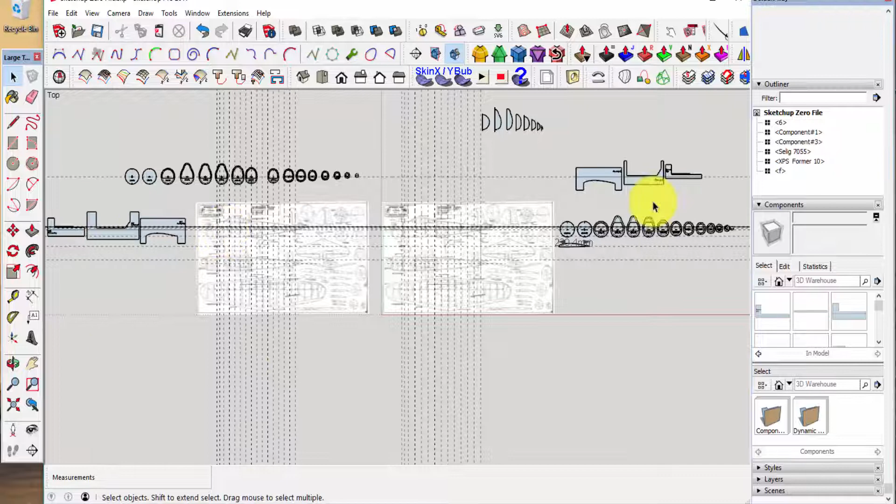Stick around. Okay, everyone, we're back in the SketchUp workspace. While I was offline, I completed the formers for all of the XPS fuselage cutouts and sort of parked them over there. I moved our EPS formers over here. These are the ones I'm using for most of this illustration. Next up on the to-do list is to make the templates for the hot wire cut foam wings. And to do that, we need to know, of course, what the dimensions are on our airfoil.

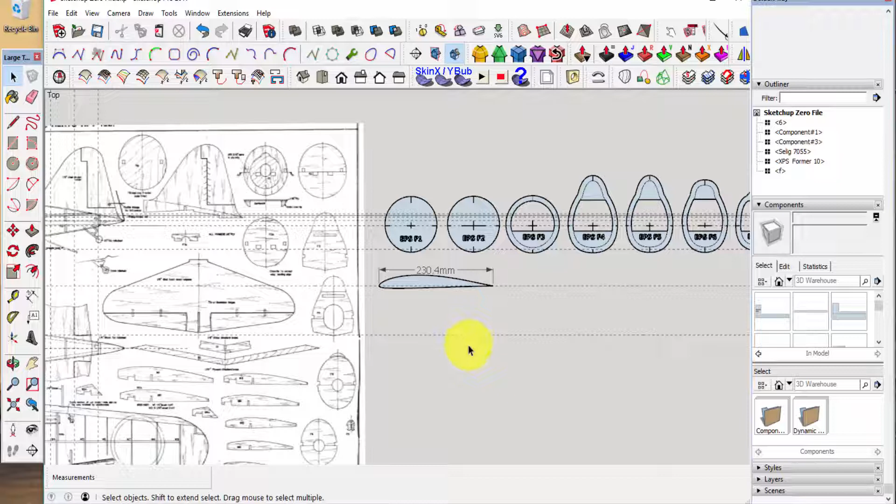There's a tool. I didn't illustrate this, but it's a tool over here on your toolbar that says dimensions. Of course, you click on one point, another point, and drag it up. We'll show that a little bit more later. But at any rate, what we need to do is take this airfoil and make something that we can use to cut a core. And it's going to be very simple and quite a lot like what we did for the fuselage. First of all, we need more or less a rectangle, so we'll just drop that. We'll put it on a line here that we know is on the ground plane, and I just drop that down there. It's really not important what this size is, as long as it's a good bit larger than your airfoil.

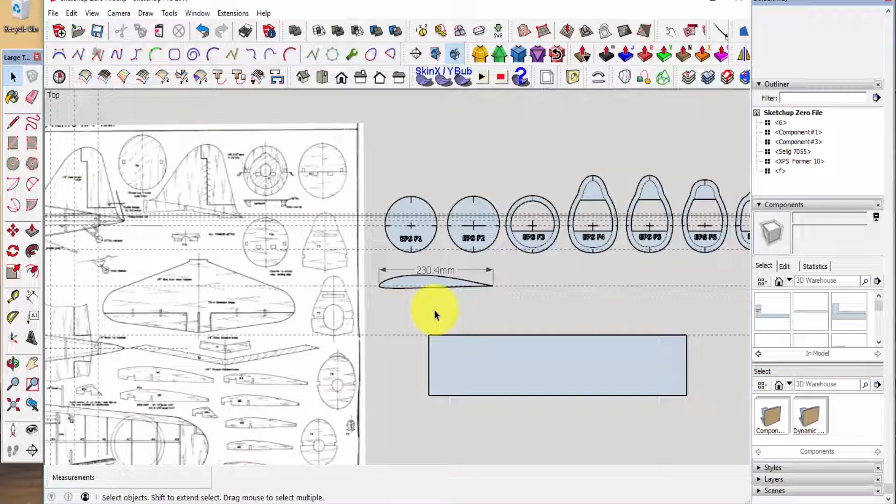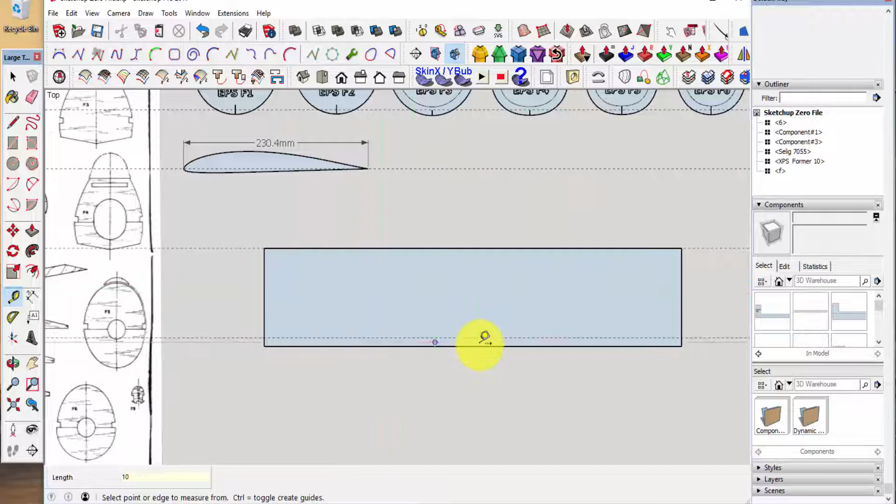Coming down here now, we're going to put some construction lines in to make things easier. And the first one is we're going to decide how far up from the base we're going to have the bottom of the airfoil appear when we sit it down here and have a cutout. I chose 10 because that's just a good all-around distance for me. You want it fairly low because it helps you save foam, but it can't be too low, or the arms from your hot wire cutter will come down here and contact the table on which these are going to rest. So you don't want that either.

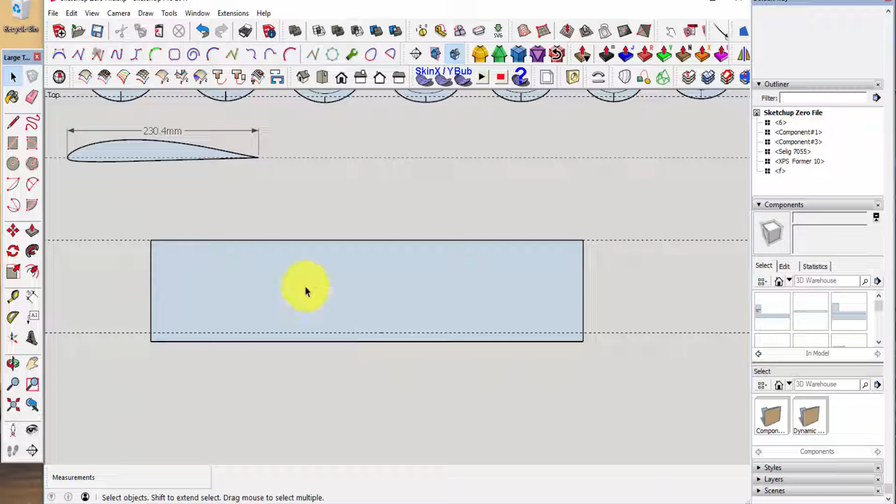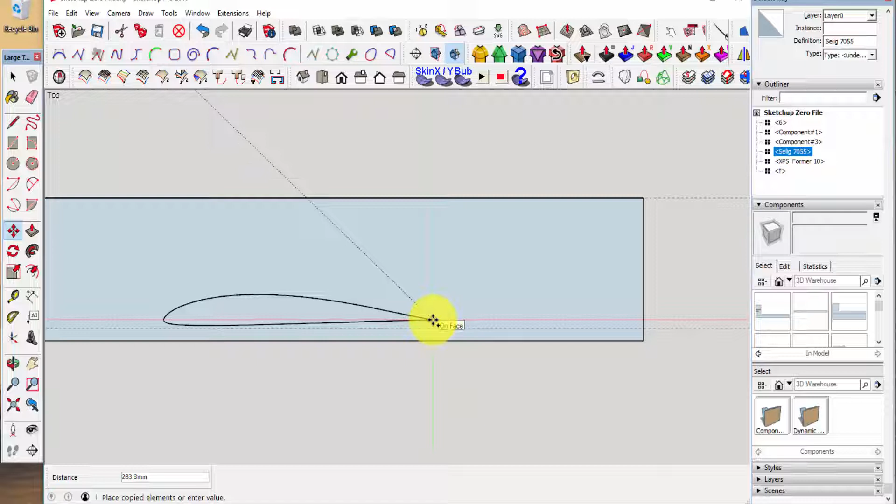Next, what we're going to do is move a copy of the airfoil down here. Again, our old familiar M for move, Control C for a copy, and we're going to pick a known point, which is going to be the end point in the airfoil. Now, this construction line down here is a reference line. It's not the be-all and end-all. It doesn't have to be super accurate. This just gives us an idea. We don't want to be below that, and we don't want to be way above it, but just somewhere in the neighborhood. We're not going to drop it on it. There's no need to do that at this point. So we just come up to clear the 10 millimeter line and put it right there.

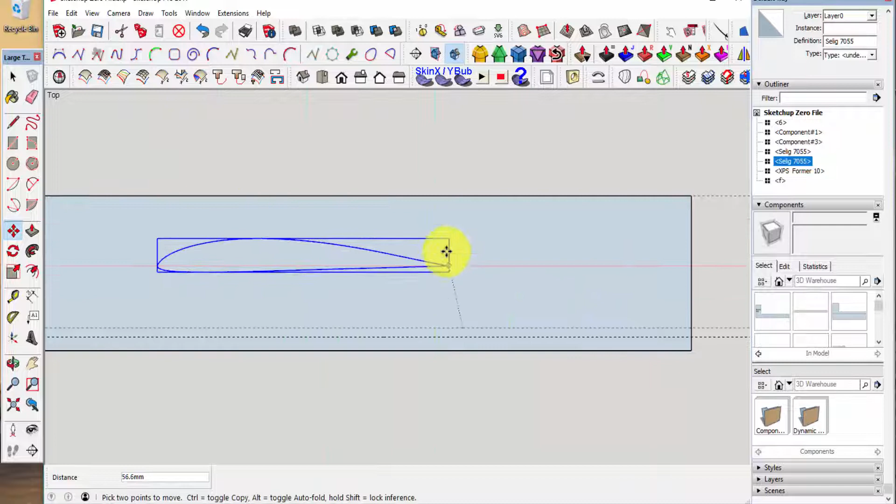Now, to make sure that we haven't moved this in three-dimensional space, I'm going to do a quick check. I'm going to take yet another tape measure tool line and come up here and see if we're on. We know that this bottom line is on the ground plane, so moving one parallel to that will also be on the ground plane. So now we know where this should be, no matter where it ends up being. As long as we drop it back on that line, it's on our ground plane.

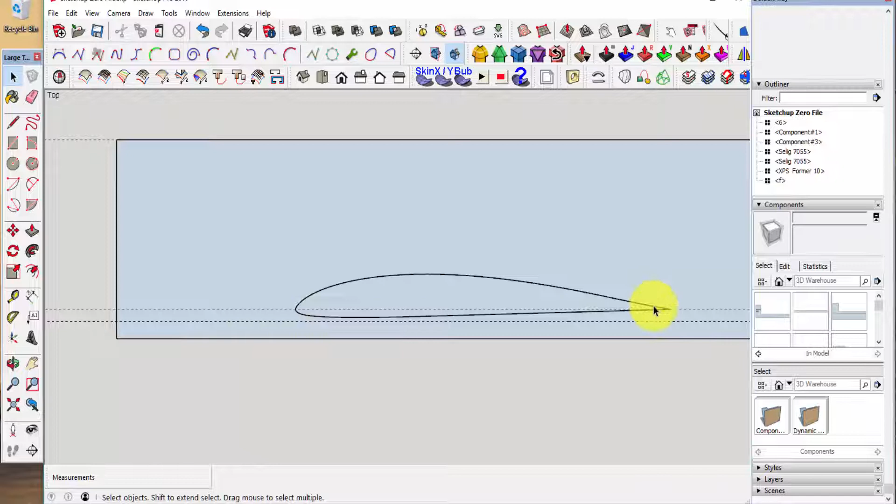Now we're going to start doing the dimensions and reducing some of the size of this huge rectangle that we have. What we need is a way to cut both the bottom curvature and the top. So we're going to need two templates, one for the top cut, one for the bottom cut for the root rib, and we're going to need two templates cut, of course, for the smaller dimension over here on the tip rib. And here's how we're going to do that.

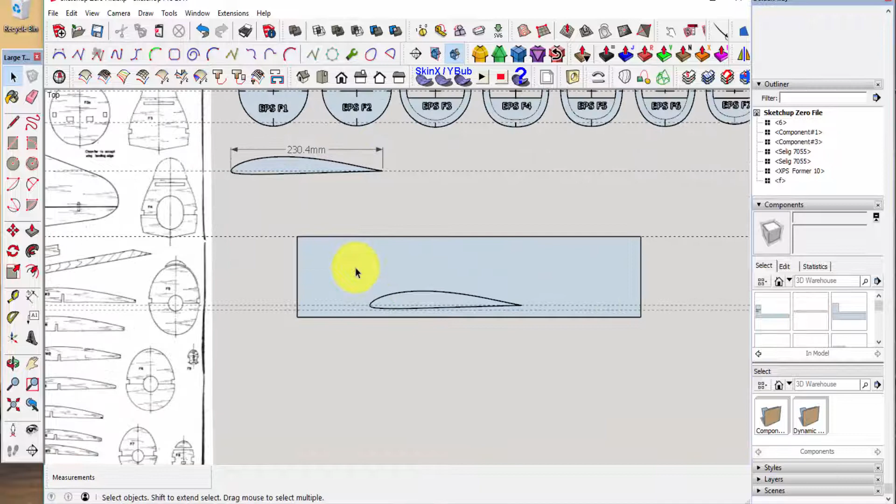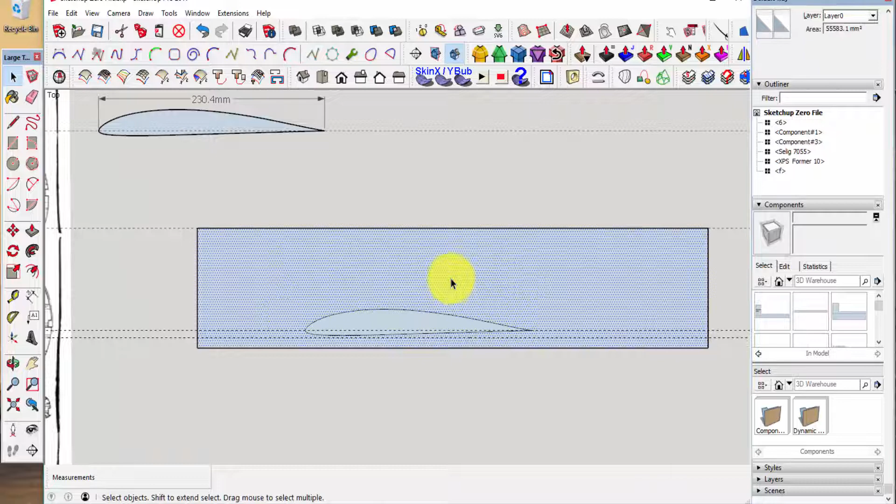Right now I'm going to hit explode on this because we're going to continue working on this and removing parts. So if I explode this, this now becomes part of this rectangle that we have just done. And we can draw on it and both will sort of take.

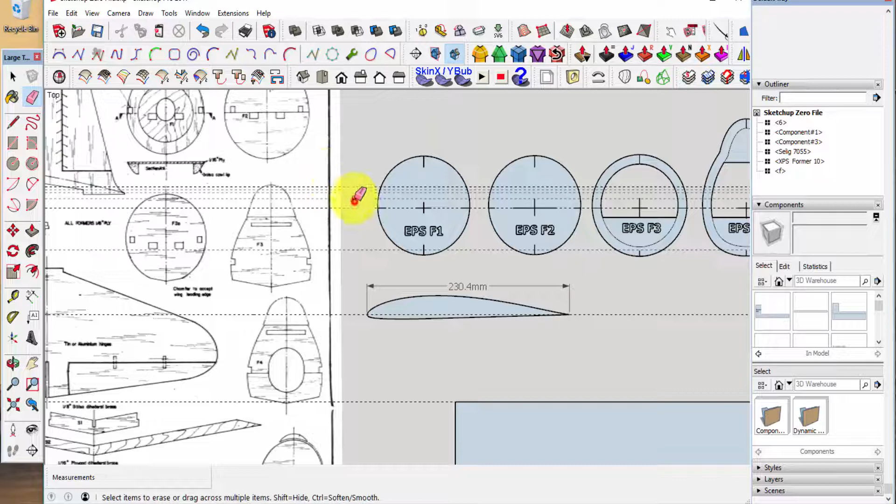Now I'm going to get rid of this kind of declutter thing. I'm going to erase this lower line. We don't need that anymore. As a matter of fact, I'm going to declutter a lot of this stuff up here that we used to measure things. I don't know why I let it just keep building up. It just confuses the issue down the road.

Okay, enough housekeeping. Now, there are two things that we need on these that are going to be common to both sets of templates, and that's a lead in and a trail out line. So we'll come up here to the very first point on our airfoil, and that's just a bit below the line as we see here.

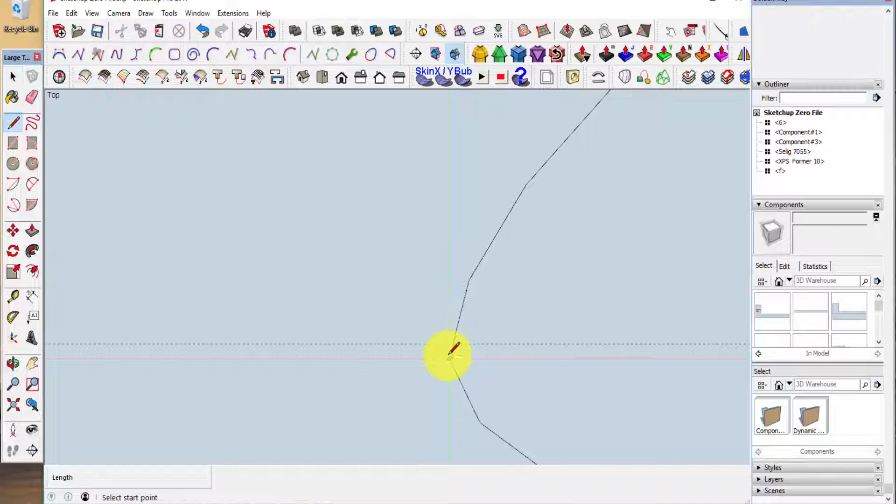So we're going to go from that, and the distance that we're going to go is pretty much immaterial, we're going to go on the red axis on the face. As long as it's long enough to give us a good lead in with our hot wire, then we'll drop down to the base. Now we're going to cut that down to shorter, but I got to measure it first.

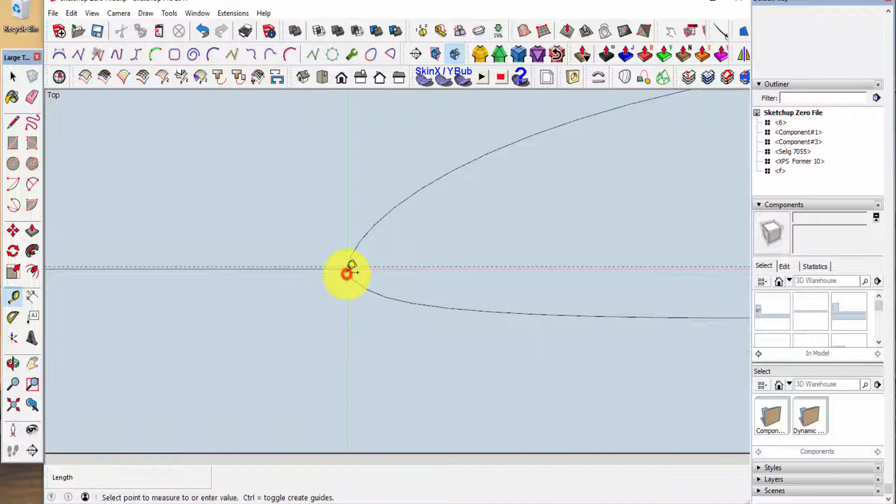So we'll take our good old tape tool and see what we got here. We only need about 20-25 millimeters. It does not have to be huge, and I've got huge, so let's undo that. We'll go to the tape tool, tape it here, and we're going to go out 25 millimeters. And we're going to drop our line down there. Okay. Here we go. Should have done that first.

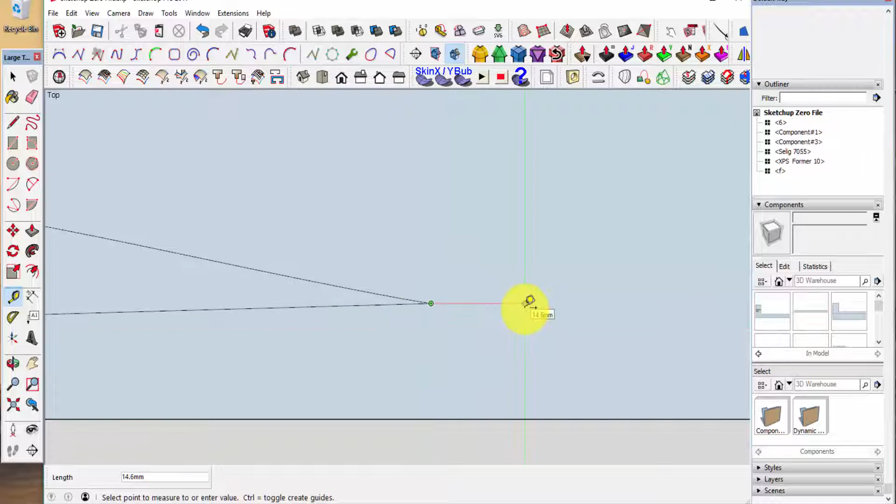Now we also need, just as we came in with the hot wire here, we need a lead out when the hot wire exits the curve, and we're going to do the same thing. And this time I'll be smart enough to use the tape tool first, and we'll go again 25 millimeters out the back, and we'll take a line.

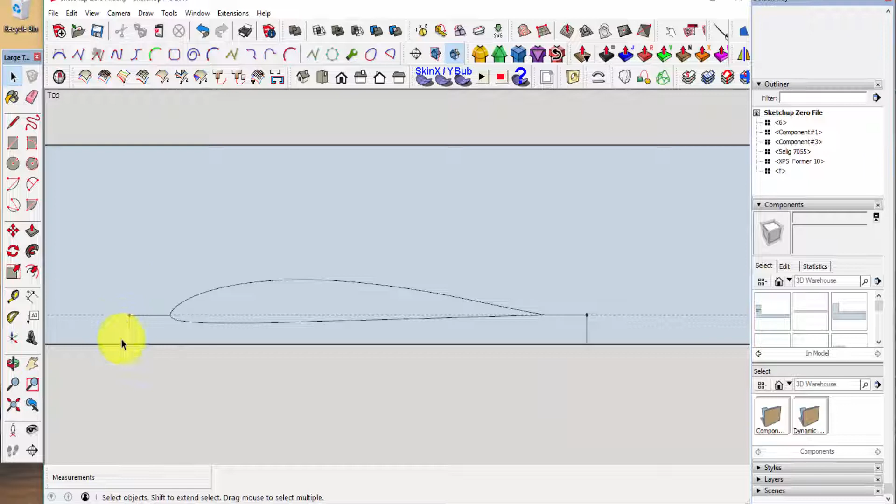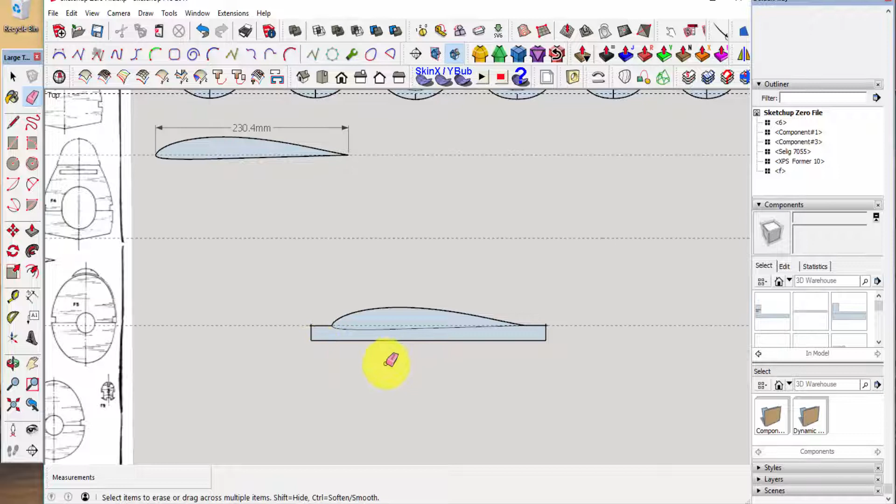We'll go from point to point, and now what we have done is created a shell here, and we can get rid now of a lot of this extraneous rectangle that we used. We're just going to more or less cut this away. So our erase tool comes into play now. I'm going to hide our construction lines again so that I don't end up inadvertently erasing them. Bring the construction lines back. Okay. Now there's a couple of things that we need to do further.

First of all, when the hot wire comes out of the back of the curved cut, the wire is going to keep moving. So back here somewhere, this is arbitrary, of course, after it exits, and far enough so that the heat from the wire won't damage the cut, we're just going to come back here and drop a little notch. Now the dimensions of this notch are not extremely important.

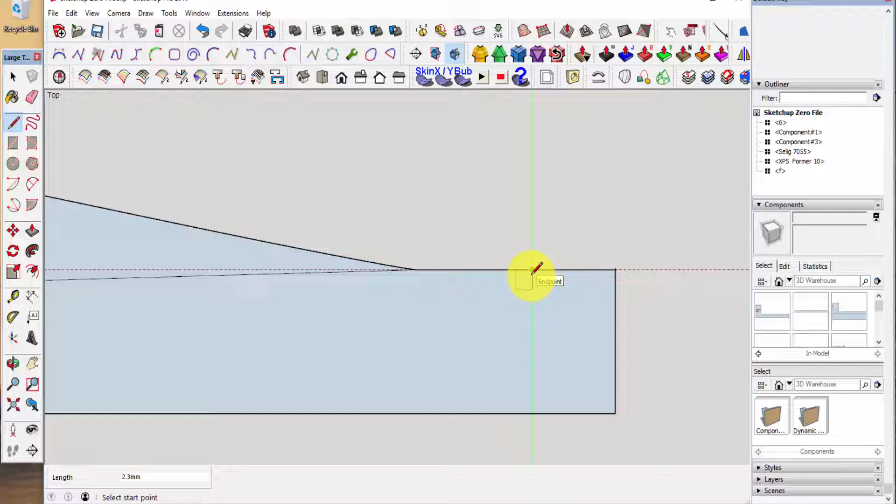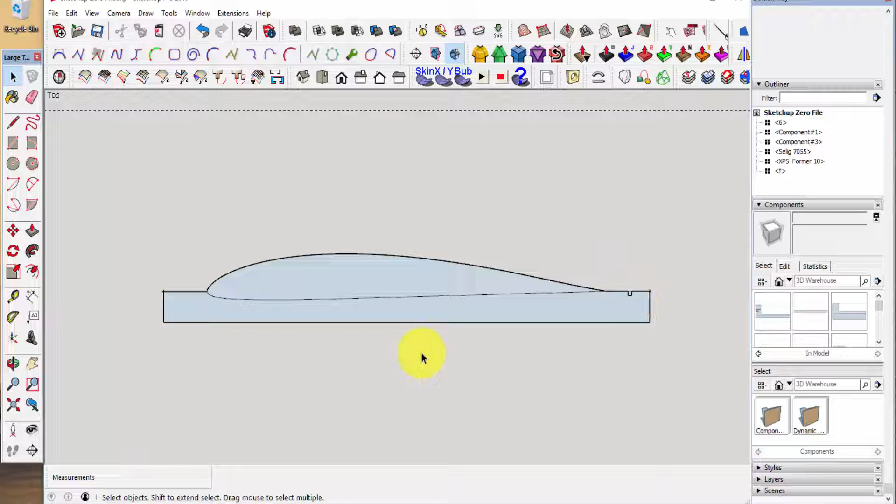What it does is it acts as a catch. When the wire comes off, it's going to keep moving, it's going to get here and catch, so that your drop bar just doesn't drop on the floor. Alright, well, we've got that. Now that's looking great for our top cut, except for one more item.

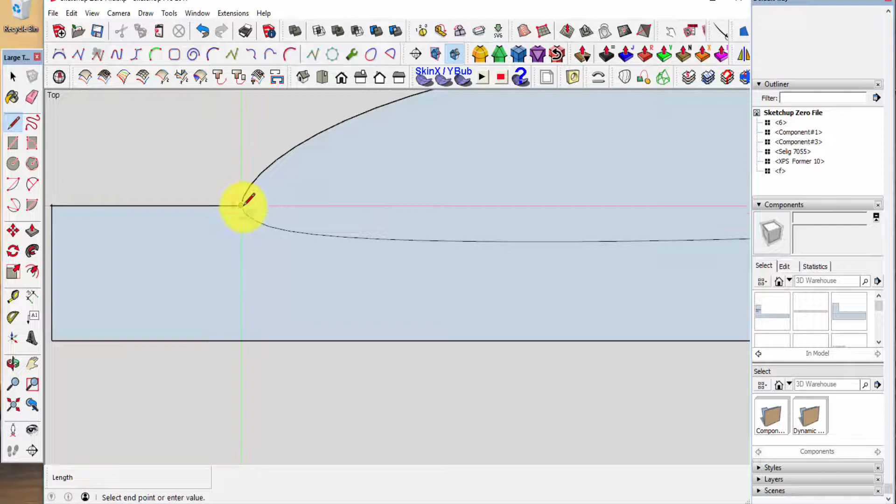When we align these templates with the end of the foam blanks that we're going to use to cut this, we need some way to align the front of this with the front of the foam. So we're going to drop a line from the very front of the airfoil template, of course, and then we're going to come in here with another line, and we're going to make a cutout. And again, we'll use our good old tape tool here, and we'll make this about 4 millimeters.

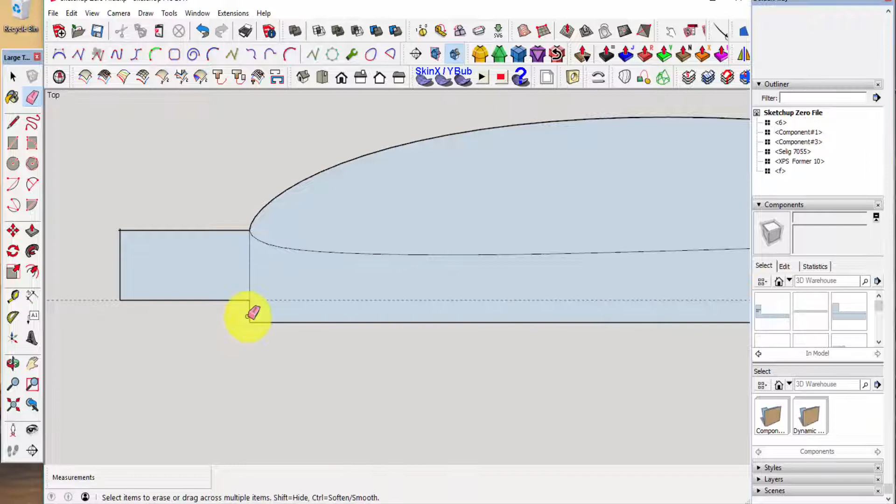What we're doing is we're going to take out a notch on the front of our templates. Now that will allow us to align very easily. All we have to do is lay a straight edge on the foam core and then bump this up against it. This will allow us to align with the front edge and be absolutely true to where we want to start the airfoil.

Now, a couple of other things before we make the lower one that we want to do, and we want to do this because this part of the airfoil, this bottom base, has to be exactly the same for the top and the bottom. It can't be repositioned or moved sideways or up and down. And in order to hold these

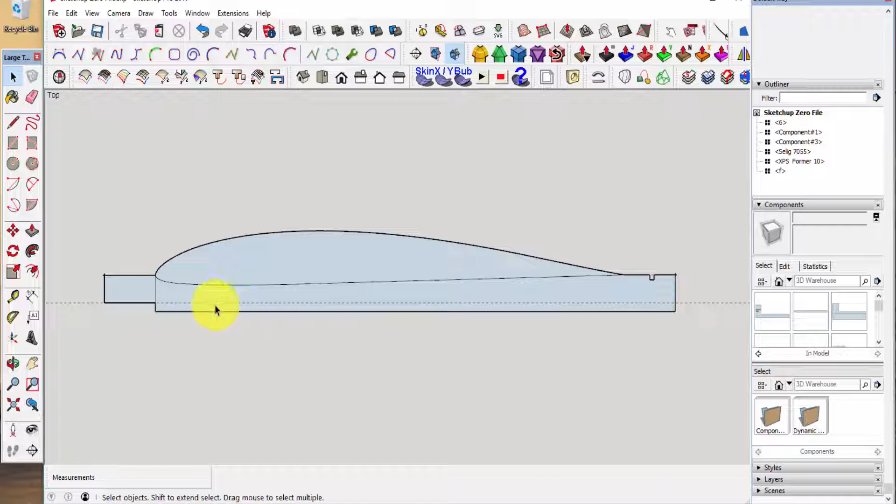onto the foam block, we're going to need holes in here. I use finishing nails, and I found that 2 millimeters is a good hole size for a finishing nail. Your mileage may vary. Whatever you're going to use to stick these templates to the end of the foam block, use that diameter. Like I said, finishing nails work fine for me.

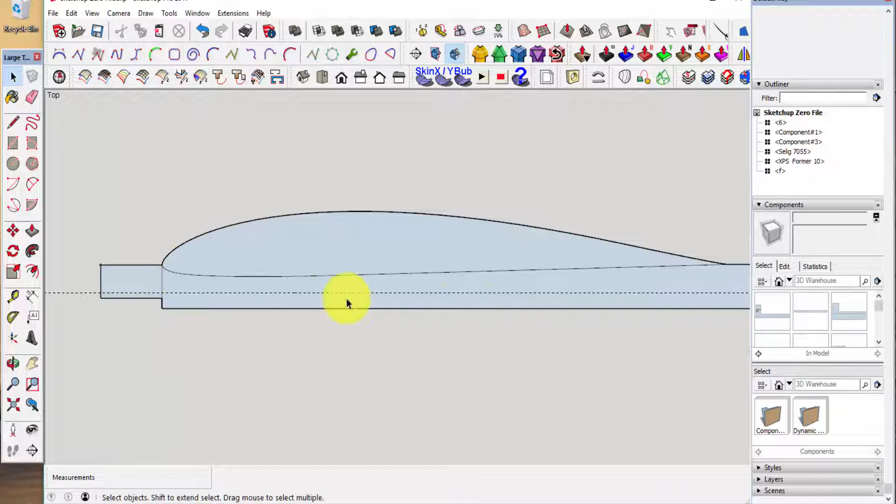So in order for these to all be on the same line, I'm going to come up here, about 6 millimeters. Again, this is arbitrary. You don't want these holes too close to the edge or too close to your hot wire cut. And now we'll come in here with a circle tool. Just hit C or choose circle from your tool set here.

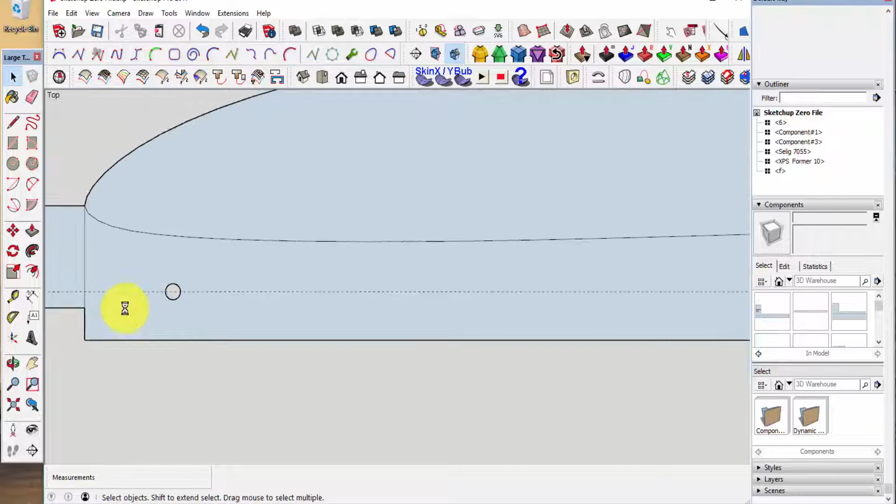And we're going to need one in the front, and that's going to be a 1 millimeter radius for a 2 millimeter diameter hole. And then we're going to punch that hole in there. Then we're going to do an automatic save again. Then we're going to come back near the back of our foam block, not to the very extreme back, and we're going to do the same thing.

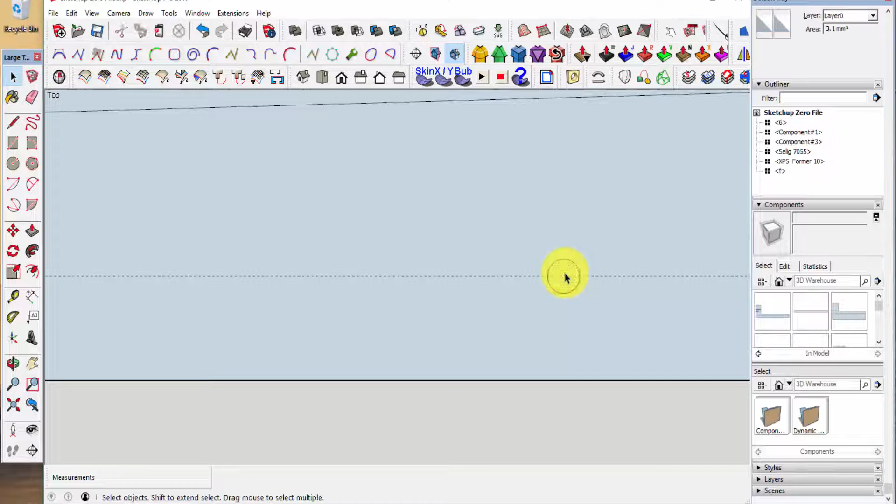Again, we're going to do a 1 millimeter radius for a 2 millimeter diameter hole and punch that out and delete it. And then somewhere along the middle, again, not critical, somewhere along here, yet another 1 millimeter radius, 2 millimeter diameter hole. Punch that out. Now we've got the holes set so that we have a means of attaching these templates to our foam core.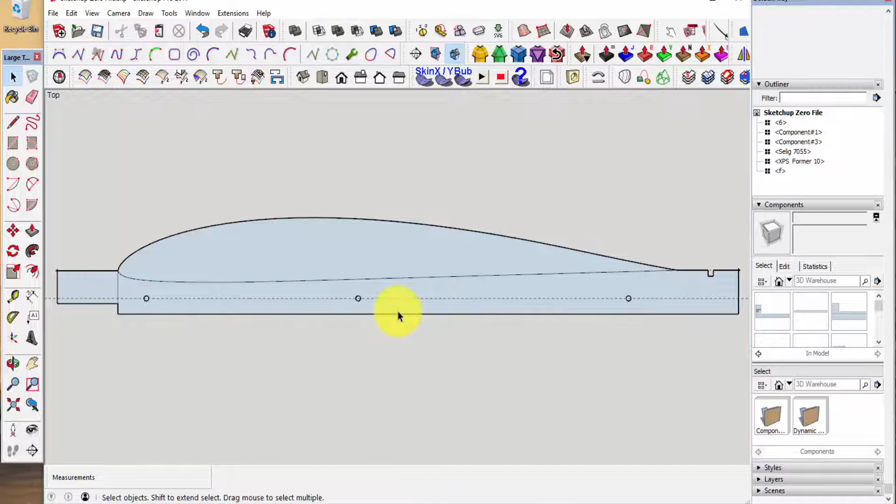And since we're going to need one cut for the top, one cut for the bottom, that means 2 templates, and we want these to fit exactly in the same holes. So now we're going to take what we have done so far, and we're going to move a copy before we do any other manipulation with that, and just come down on the green axis so that we know we're on the same plane.

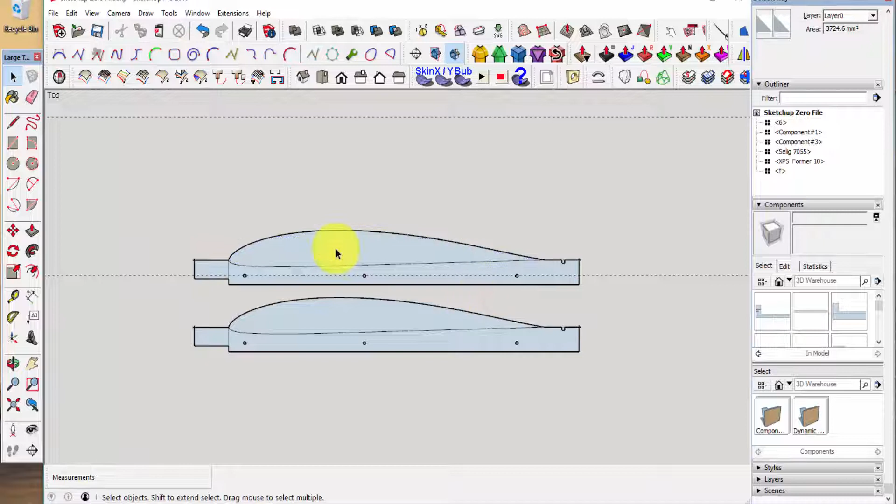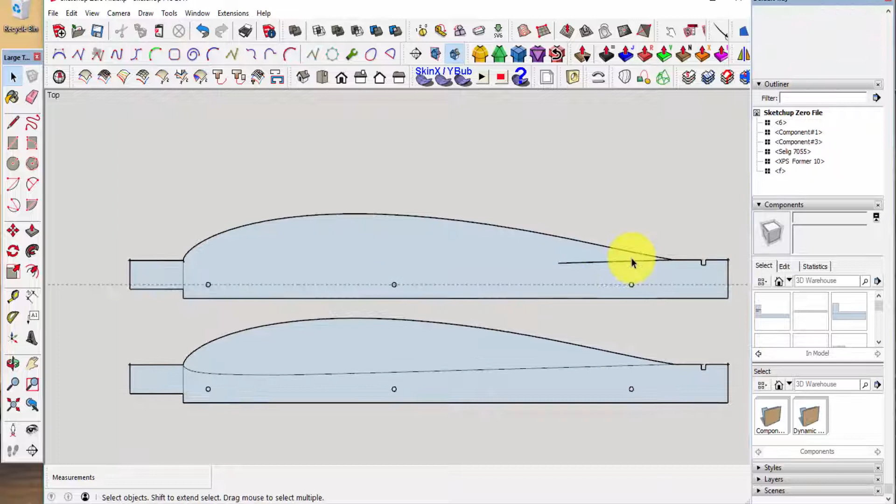Now we're going to use this top one for the top cut, and that's fine. We can just leave that as it is, it doesn't really matter. If having this line in here bothers you, you can always just come in here and erase this bottom part, but what appears here is just going to be cut out, taped on to whatever material you choose to use for your template material. I'll go ahead and erase that just to make it pretty.

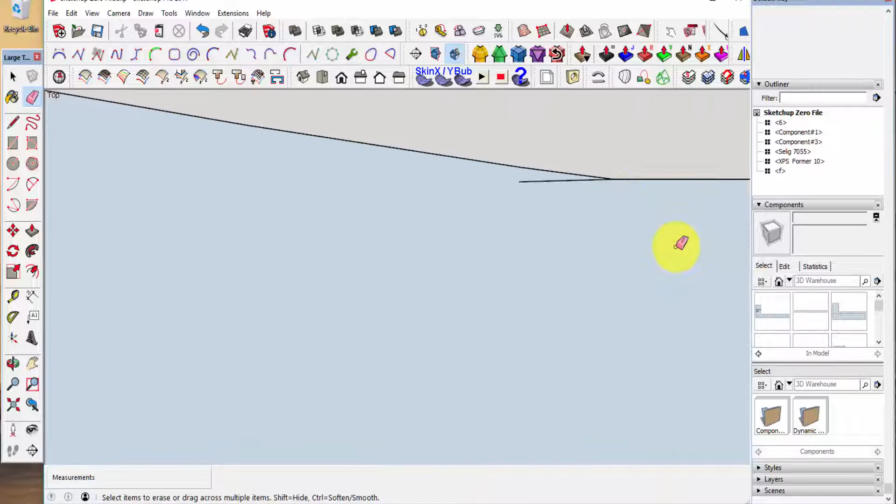As you can see, these curves are not actually curves, they're line segments. There's just a lot of them and they appear to be curves. Oh, there's even one way down here. Okay. Alright, there you go. That one is done. Now we've got to have our lower curve in here, and we are going to have to do some erasing down here.

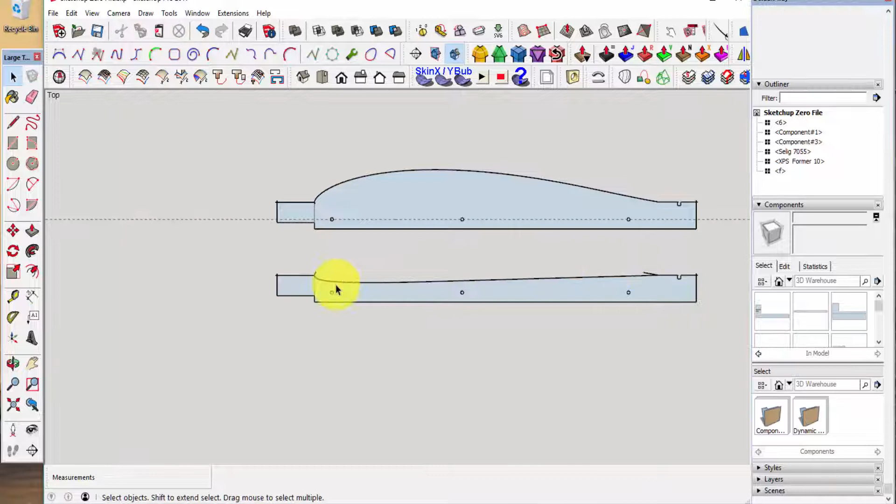So right now, we select that template, we get rid of that, and come in here and start getting rid of that upper curve. There we go. Now you have it.

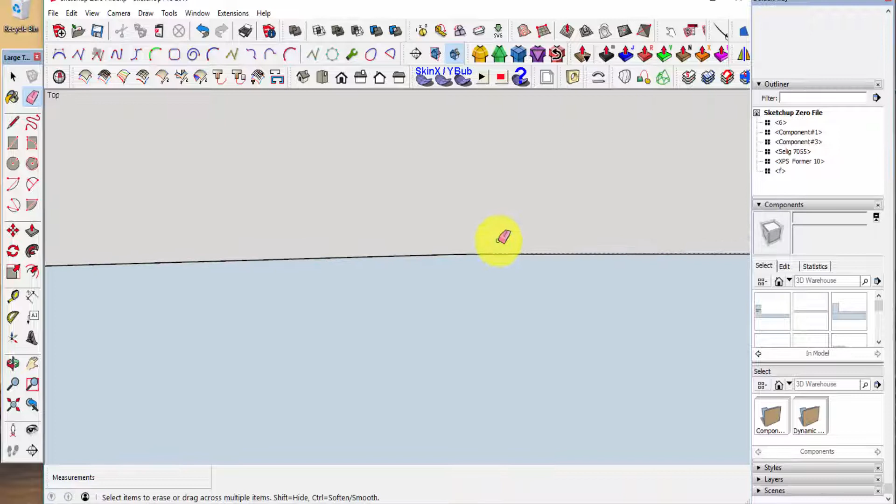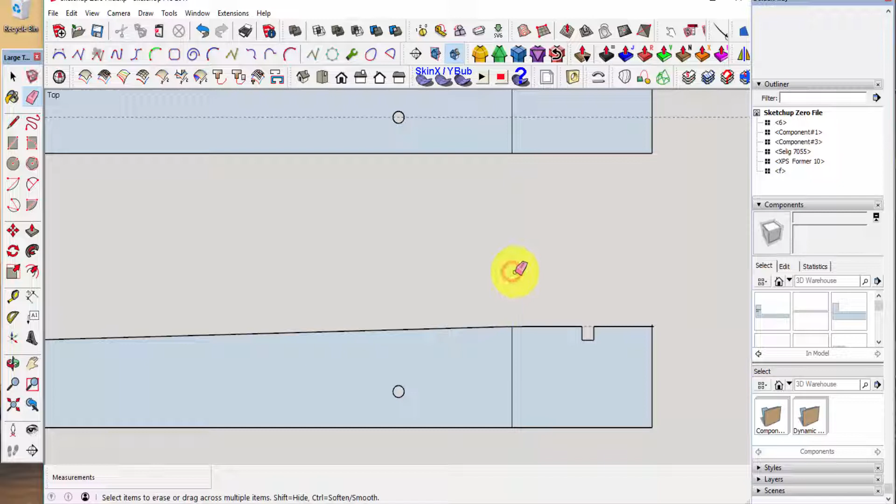One thing I am going to do, just for reference sake, is I'm going to draw another line on the template at the very back where it comes off of the foam. So if I go up here, now we've got a line that will be through, and we'll know if this aligns with the back of the foam block that we're absolutely true in our alignment. It's just a reference line. That line is probably not absolutely necessary.

Okay, now we've gotten the root rib template done. This is all we need. We can print this out, stick it on a piece of whatever you're going to use. Like I said, I use masonite cut out with a scroll saw, or some aluminum flashing, whatever you can use that can be smoothed so that the hot wire can run over it.

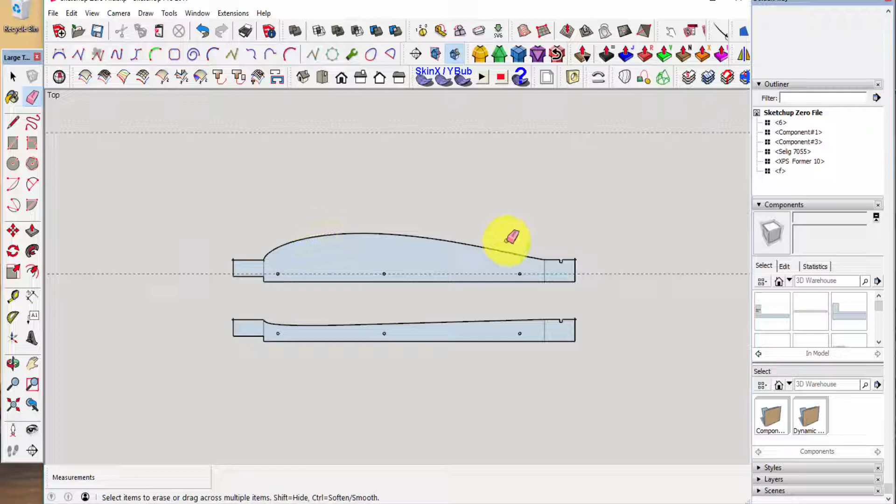Now we've got another set of templates to make, though, because of course our wing tapers. So we're going to have to come over here and measure what we're going to need for the tip template. Now we're going to make this template start right about here instead of out here at W9, because we need to have the foam block, the square portion of the foam block, end before we start the tip curvature. The wing tip is going to be a separate block of foam that's glued on after we've cut the core. We'll glue on a separate block and then shape it to match.

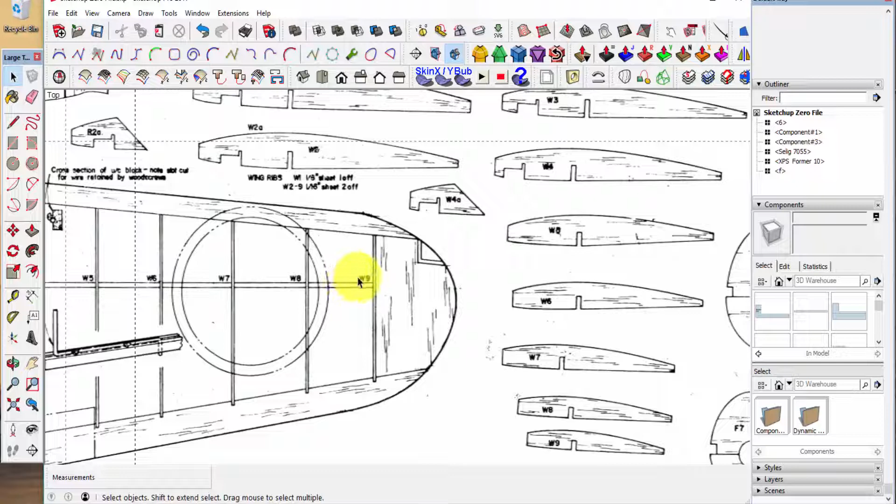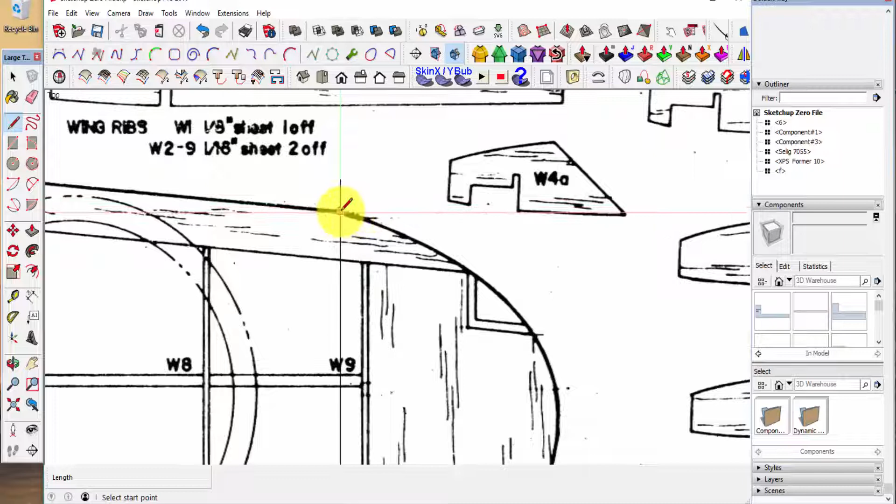So if we come over here now and we start looking for a place to drop a line, we should see that the curve starts right about there and come down to here. Now, again, I'll drop another line up here so we'll have some place to reference for a measurement and come out. So we know that our tip rib, and tip templates, is going to be this long.

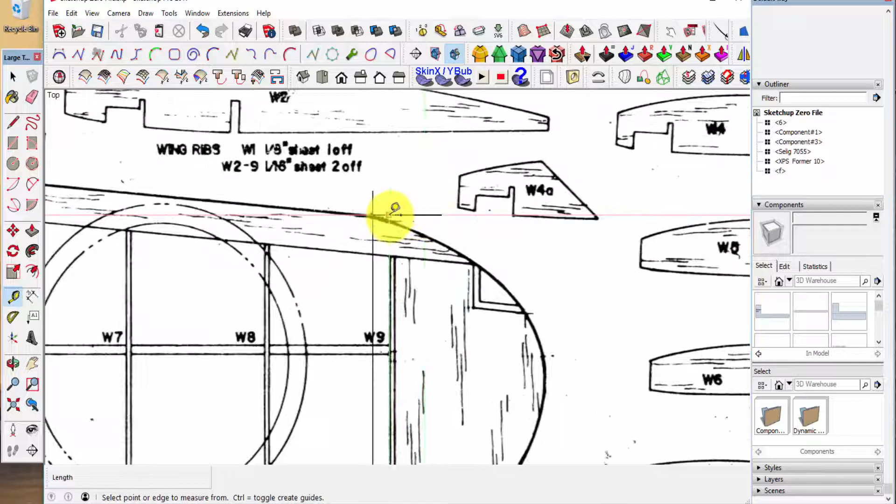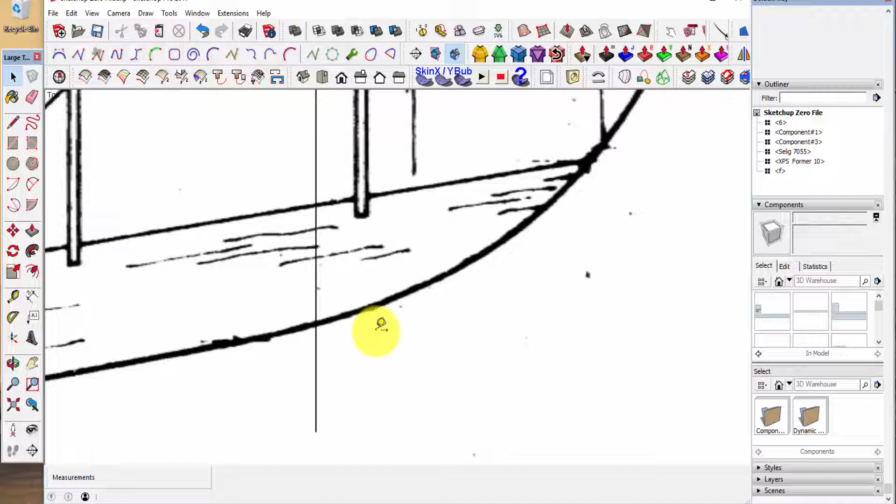So now I'll go back to the tape measure tool again to figure out what this length is, and we'll just come in here, get on this line, come down here, and as you can see right there, we're at about 126 millimeter, 125.8, we'll call it 126. So our tip template is going to have to be 126 millimeters long.

What we've got to do now is take our master component, move, Control C, a copy, and we're going to move this over and resize it. I'll drop it down here. Now, we have to be careful when you're working with components in SketchUp and you're working on a copy of the component. Whatever I do to this will automatically be done to that. And we don't want that. We want this to remain its full size.

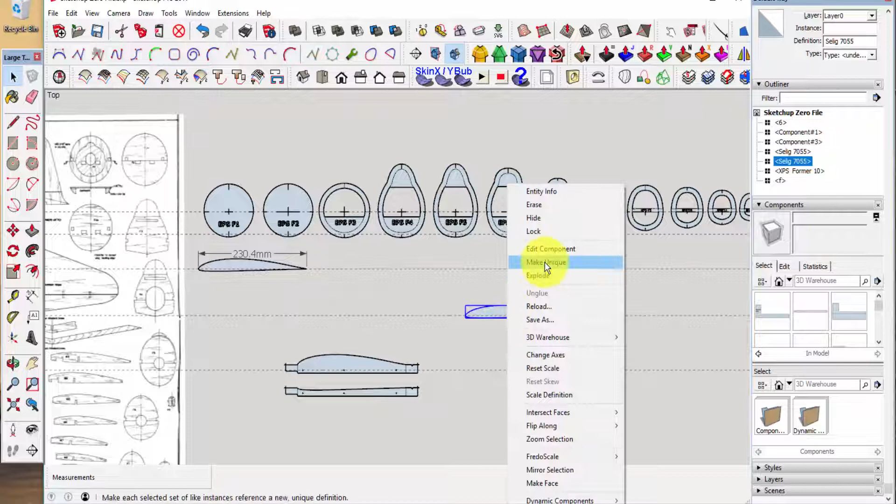So there are a couple things you can do. Number one, we could explode this now, but I don't do that. I want to size it first. Number two is you can right click, and instead of edit component, we'll just make it unique so that what we do to this component will not be mirrored over here on this one. So now this is a unique component.

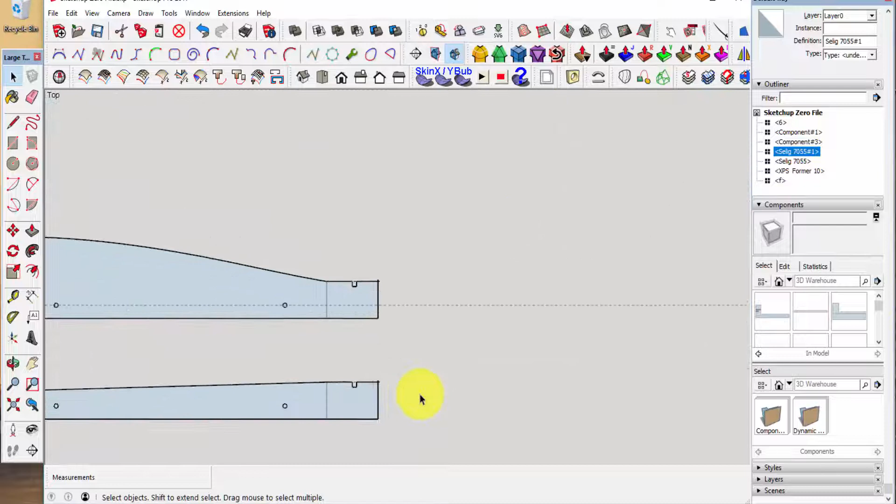So we need this to be 126 millimeters long. And to do that, again, just using reference points on stuff you've already drawn is about the easiest way to get lines parallel. Let's go up here to this leading edge. Well, I'll tell you, I'm just going to drop this somewhere. There we go. Now we've got a vertical. Now let's take that vertical and go 126 millimeters that way. Okay, there's how wide we need our tip rib to be.

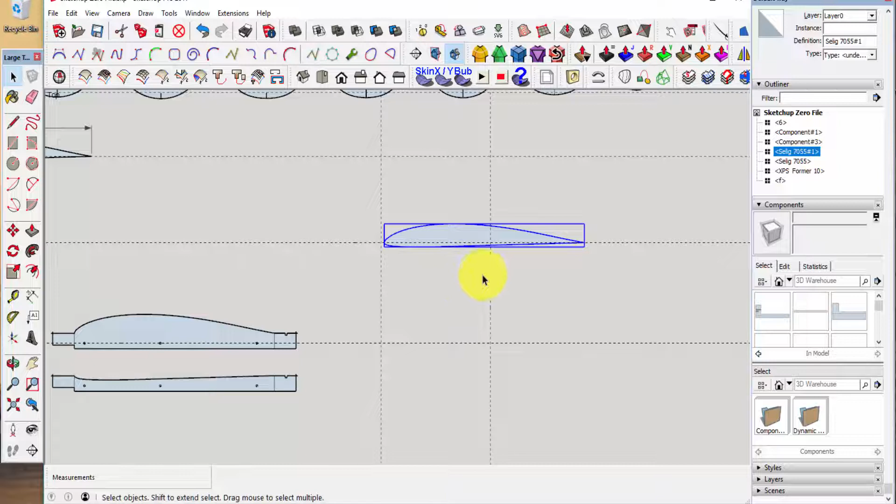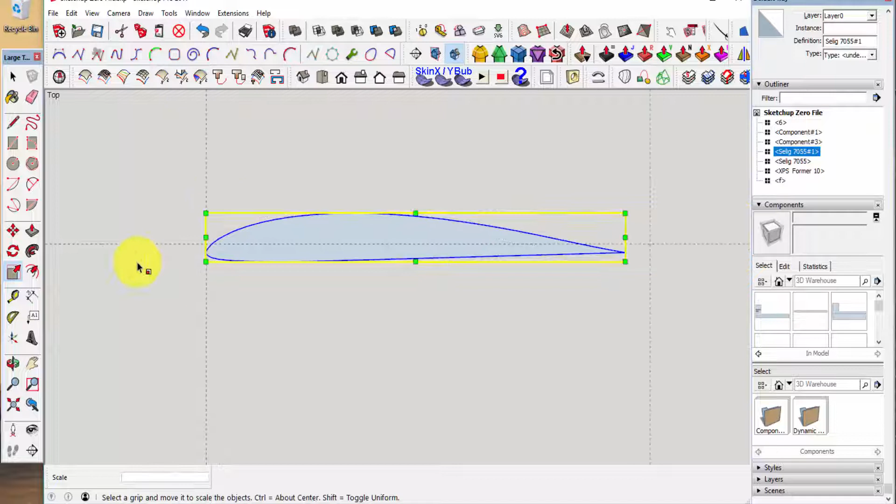So come up here, select this, hit S for scale, or come over there and select scale from the toolbar. Now we'll start pulling. Again, we pull all the way across on the opposing handles so that we scale the entire plane. We're going to pull that in there to that guideline, and that in there to that guideline. And now we've got 126 millimeter airfoil.

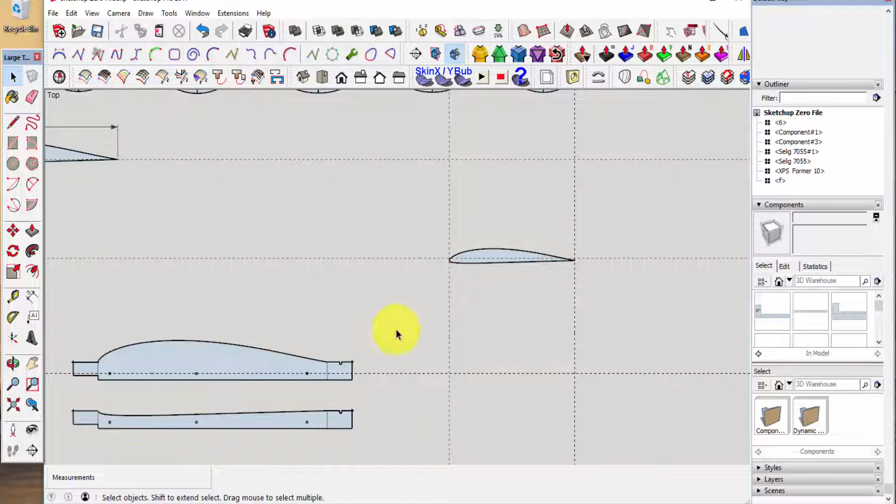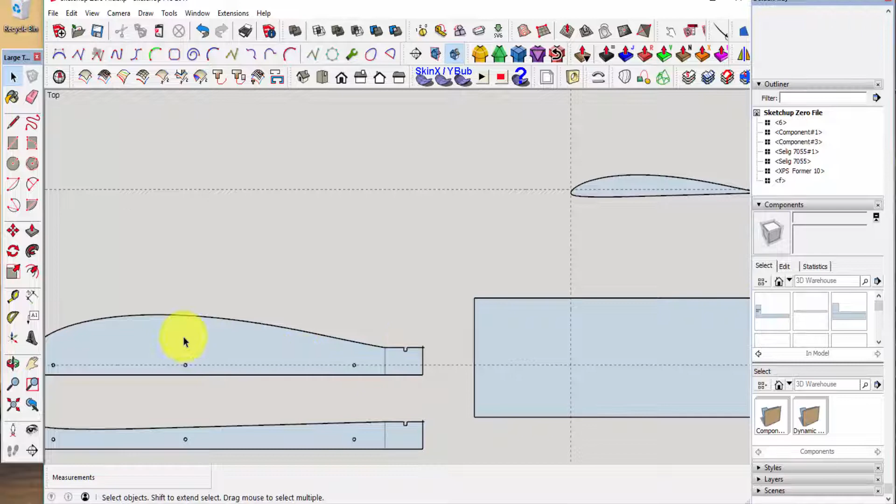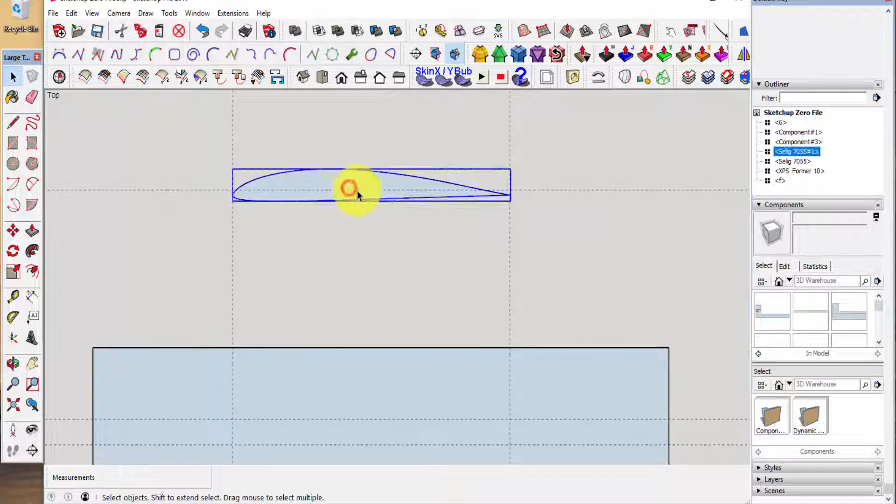So if we come down here now, we're going to do the exact same thing except on a smaller scale. Let's put a rectangle down here, again, more or less arbitrary size. We're going to return over here because we want the wing to be straight, of course. We want the center line of the tip airfoil to be on the same center line that the root is on. So in order to do that, we'll come over here, come up to the endpoint, and that shows us where the chord line is, and we want this to be on that chord line. So now we'll select the component, and we're going to move it.

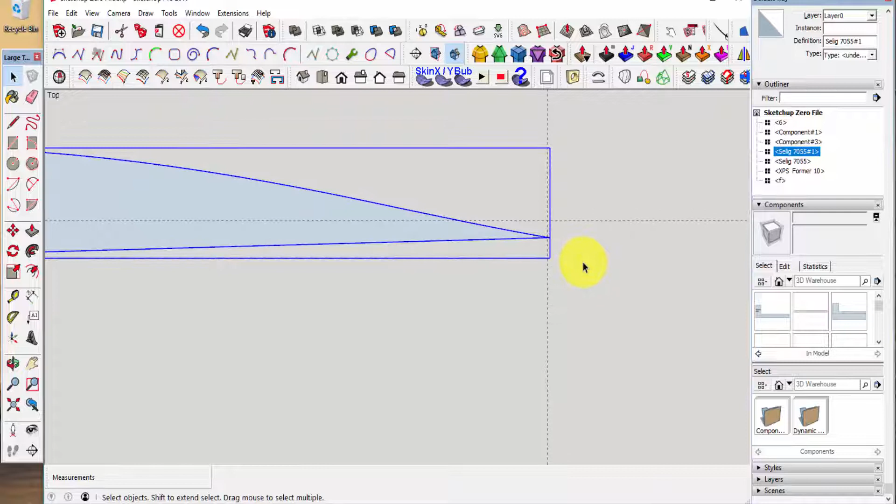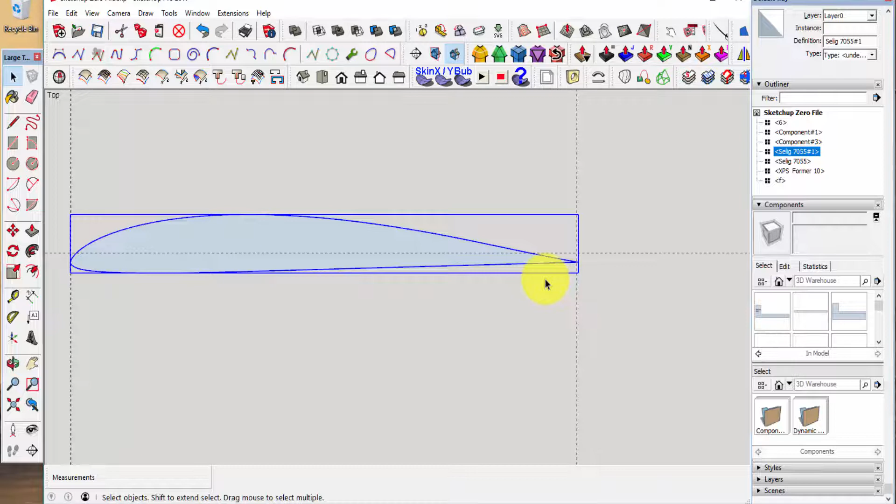Well, looking at it now, the component here is just a little bit larger. It's not very much, but I'm not going to move that, and here's the reason why. When we're cutting these cores, the hot wire out at the tip is going to be moving a little bit slower than the hot wire at the root. And what that tends to do is melt back the foam a little bit. It tends to make your tip distances a little bit shorter than they actually should be. So I'm going to leave this very, very minute amount of overlap here. That will work just fine.

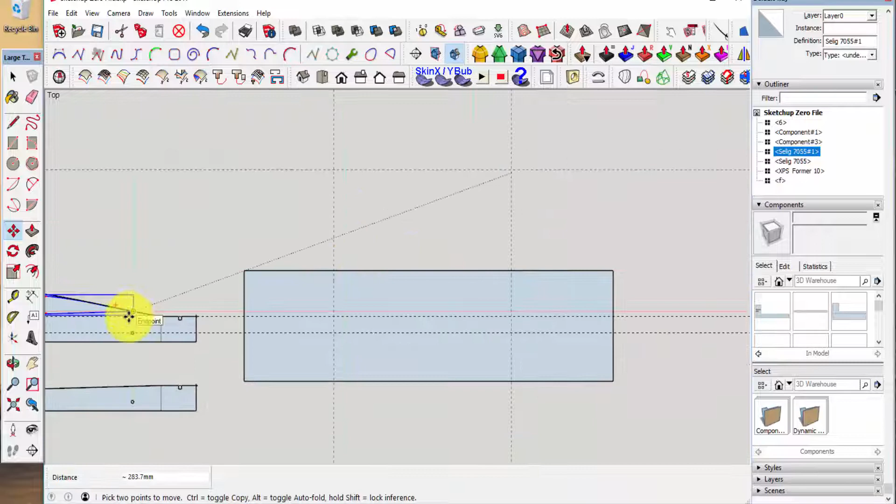So let's go in here and move this. We'll take this tip and we're going to come down here and put it on the chord line intersection right here. Put it on that line. All right. Now that we have that line in there, we're going to come in here and start erasing all the extraneous stuff on the back, just like we did over here.

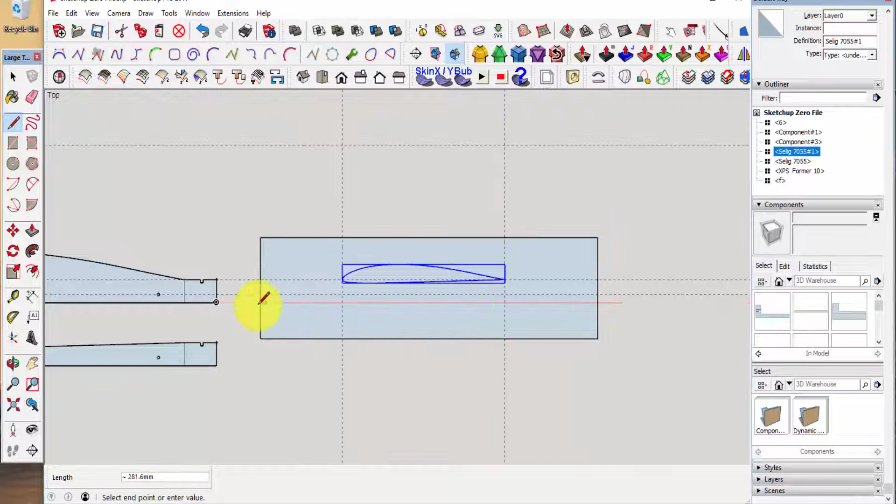Now we want these to sit the same distance off of the table, so we'll come over here to this end point and we'll just take a line measured from that point and put it right across there. As you can see, if you hover over a point in SketchUp, it references that point for other lines that you might want to draw. So it referenced that baseline for us just fine. So now we've got the bottom of the template. And we'll come over here and get rid of that. So the bottom of the template's done.

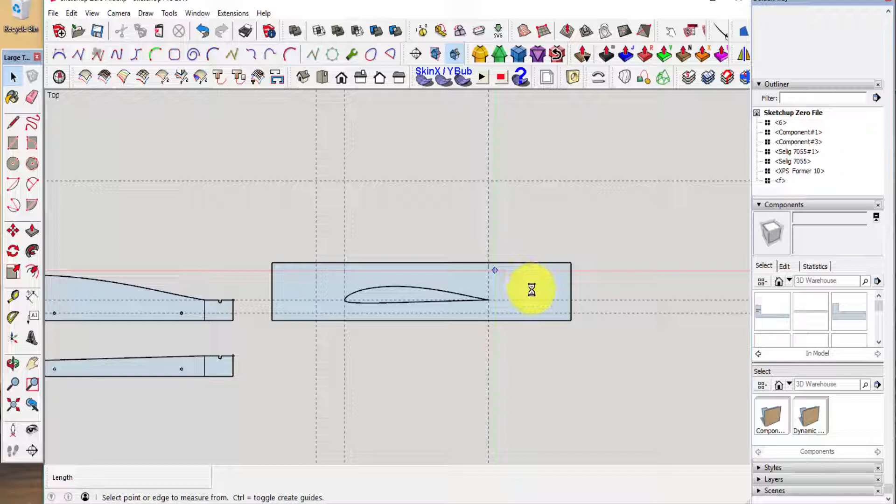Now we're going to do the top the exact same way. Come in here, 25 millimeters. Come back here, tape tool again. Another autosave. Another 25 millimeters here. There we go. And now we're going to do the same thing that we did here. So I'm going to speed this up. You don't need to see this twice. So I'll speed this up to save time.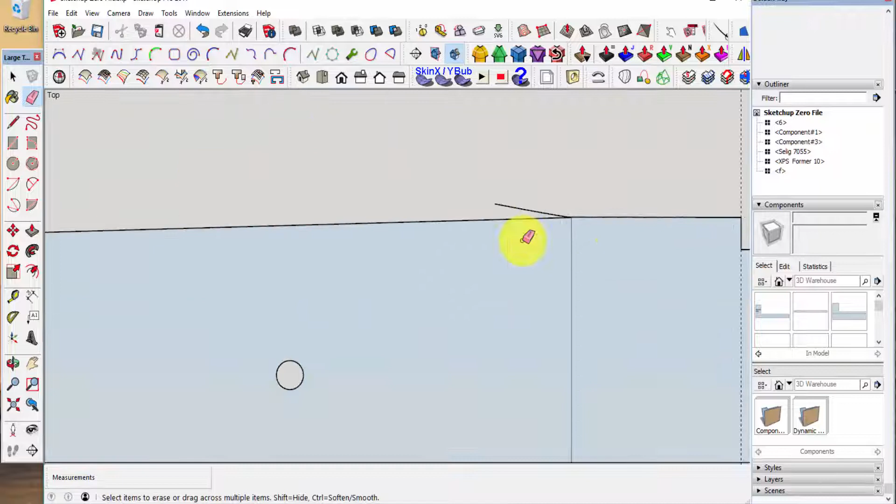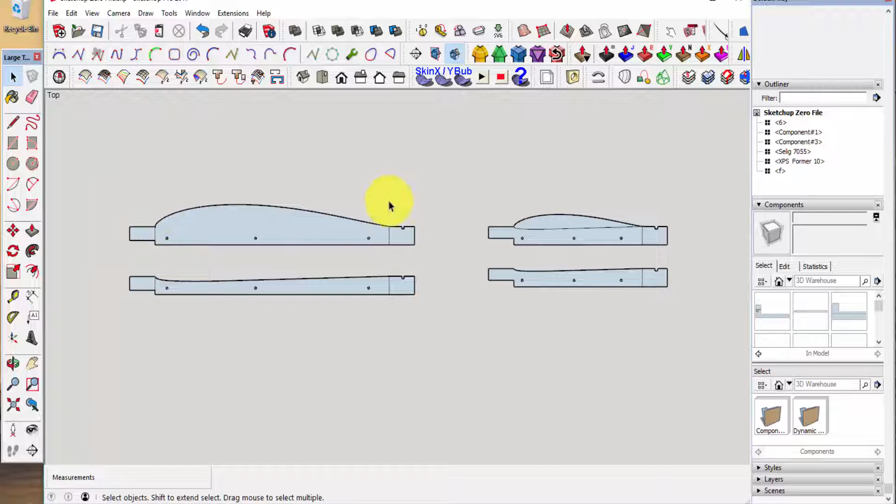And there we have it. There are the template cutouts that we're going to need to make. And again, you can use any material that works for you. If you're a newbie at it, Formica is hard to beat. You can use G10 resin impregnated board or something of that nature, but this needs to be cut out accurately and smoothly, and it has to have a smooth surface for the wire to run over.

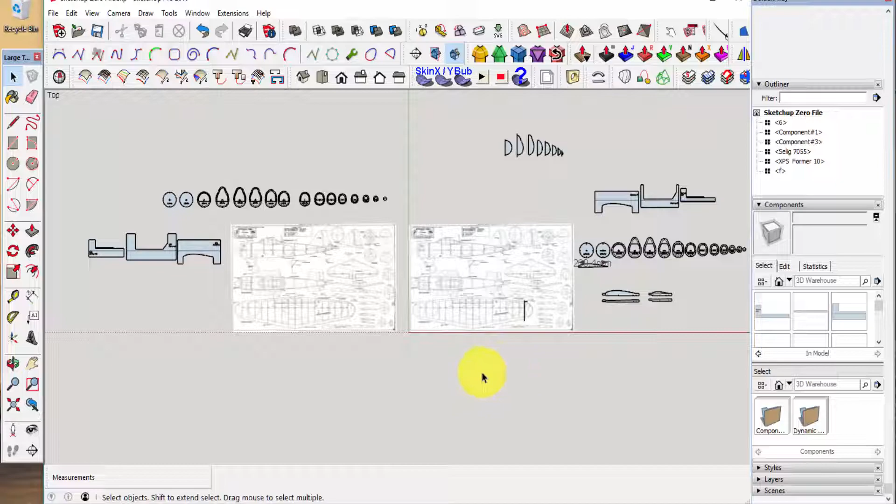Back again in the SketchUp workspace. However, I want to take a quick moment to insert another clip here showing the materials I use to cut these templates that we've just been working on. Here goes. Okay guys, here are some examples of airfoil templates that I've got in my template stash. I've got scores of them now, but at any rate, these are some used on past models, and I just wanted to show that your templates can be made of various materials.

I now have a 3D printer, so I even tried 3D printing some airfoils. Now, of course, the plastic that this is made from is not heat resistant, so what I had to do was take some aluminum duct tape and put a little duct tape cap on that to protect it from the wire heat. But 3D printing works fine if you've got a 3D printer. Next is very common stuff found in every hardware store. It's aluminum flashing, and these were cut from aluminum flashing using scissors, and then the roughness sanded away.

These here still have the paper stuck to them, but these are Formica, and you can actually go to Home Depot and Lowe's and get free samples. Just go to the cabinetry or kitchen section and they'll give you free samples of this stuff. Or if you have some sort of a source, it's just thin Formica, and perhaps of all of these it works the best, but they all work. So choose whatever material is best suited for you and use that.